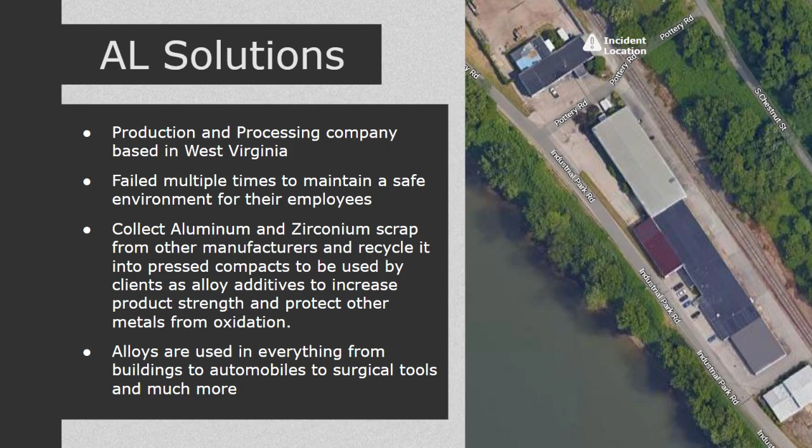Although AL Solutions is integral to society, they have failed multiple times to maintain a safe environment for their employees. The most notable of these incidents is the dust explosion at their New Cumberland location on December 9th, 2010. Three operators were fatally injured, and a contractor was wounded in the blast.

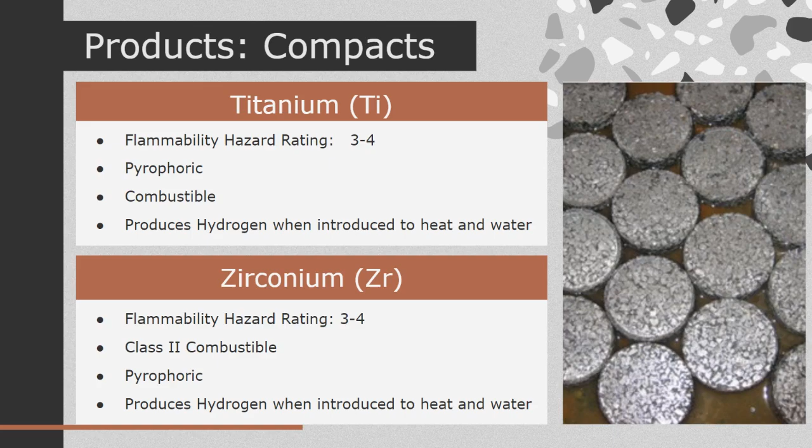Pmax, or maximum pressure, is the greatest amount of pressure and maximum amount of damage that the dust can cause in a confined space, while Kst is the dust constant. Maximum explosion pressure can be independent from the size of the vessel, but the rate of the explosion pressure cannot be. Because of this, the larger the vessel, the lower the maximum rate of pressure rise will be.

The constants are given classifications based on the range they are in. For both zirconium and titanium, they fall within the range of 1 to 200 bar meters per second. This classifies them as ST1s, or weak explosions.

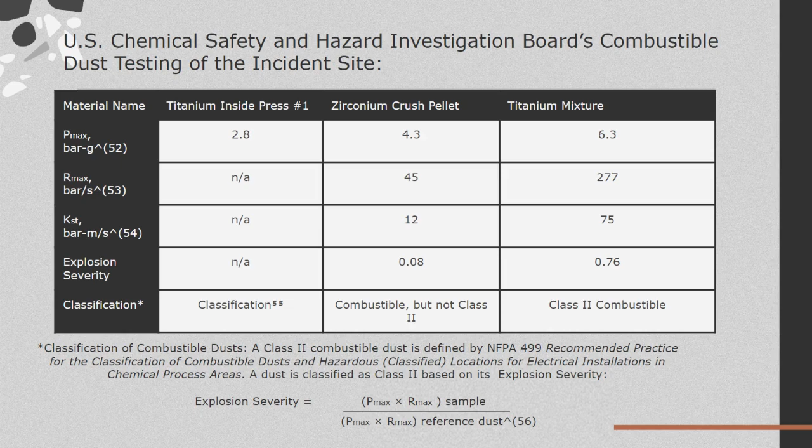During the incident, two operators were on presses and another was working the blender. The blender's metal blades struck the metal wall, causing an ignition source and ignited the zirconium inside. Zirconium dust cloud wafted into the air and exploded. This ignited all the storage drums filled with titanium and zirconium, leading to extensive damage.

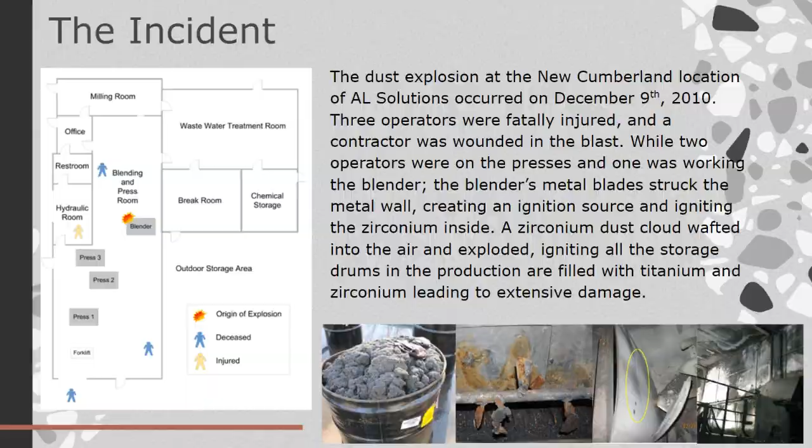Leading up to this incident, safety requirements such as closing the lids of the blender, storage drums, and hydraulic presses whenever possible, keeping material not in production in a separate warehouse, and industrial hygiene practices were never reinforced by management.

This resulted in a non-existent safety culture, and in addition to this, when the blender started to make metal-on-metal contact, management only went as far as enacting short-term solutions like replacing parts or readjusting the blades instead of readjusting the entire blender or replacing the entire blender.

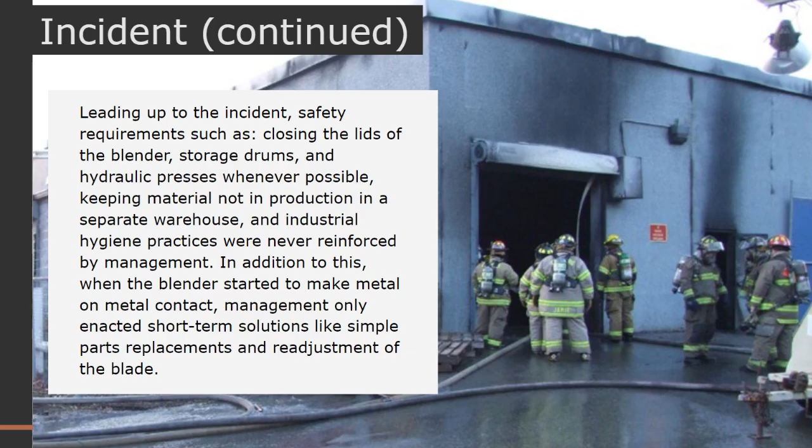The USCSB created a model of the process that led to the explosion, which I will now play.

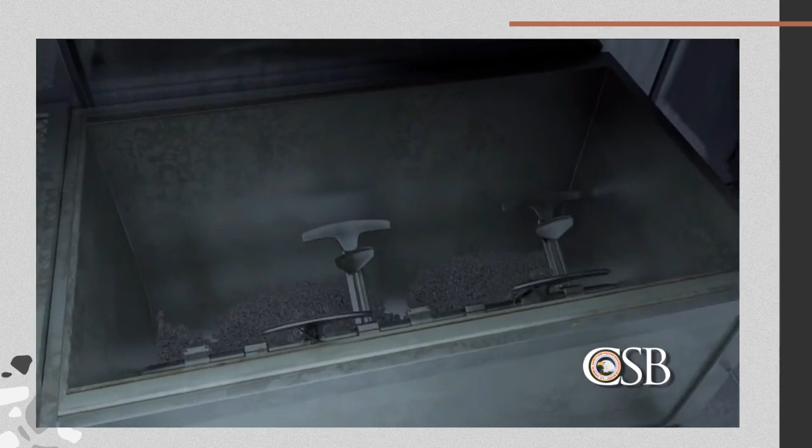As the metals were broken down during milling, the risk of a metal dust fire or explosion increased as the metal particles decreased in size. A metal blender used to process zirconium was having mechanical problems that had not been adequately repaired. As a result, the blender was producing heat or sparks due to metal-to-metal contact. Around 1:20 p.m. on December 9, 2010, a spark or hotspot from the blender likely ignited the zirconium powder inside. The resulting flash fire lofted the metal dust particles in the blender, forming a burning metal dust cloud. The cloud ignited other combustible dust within the production building, causing a secondary explosion that ripped through the plant, killing 3 workers and injuring a contract employee.

Dust explosions require 5 things: fuel, an oxidizer, the suspension of the dust particles, the confinement of the dust particles, and the source of ignition. The removal of either the suspension or confinement element can prevent an explosion, but that won't prevent a dust fire from occurring.

The titanium and zirconium acted as fuel in the situation, with air being the oxidizer, while the metal blender took up the role of confinement, suspension, and the ignition source. The heat from the metal-on-metal contact in the blender created the ignition for the first explosion. This ignition source would have been completely non-existent had the blender been properly maintained.

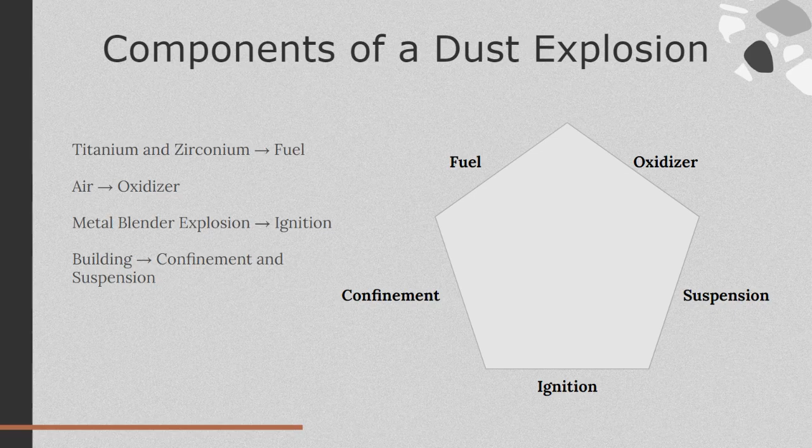Now, to estimate the volume of the inside of the building for our formula, we went back to the video that the USCSB created. A standard door in the US is 36 inches wide and 80 inches tall. Using this information, we can estimate the building's exterior to be 504 inches wide and 192 inches tall. That can also be stated as 12.8 meters wide and 4.88 meters tall.

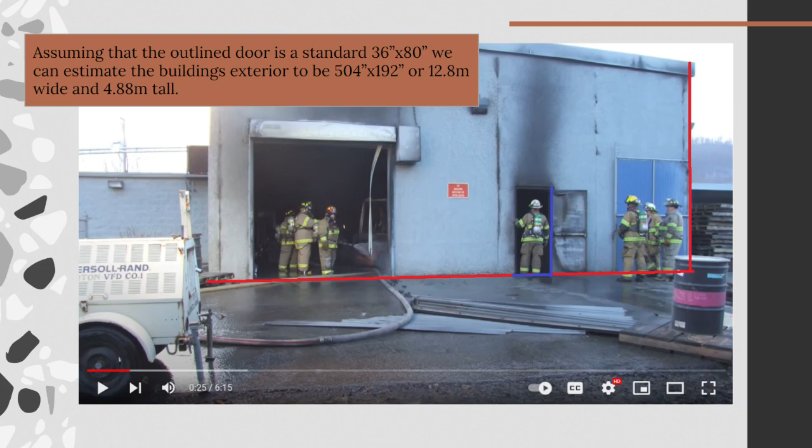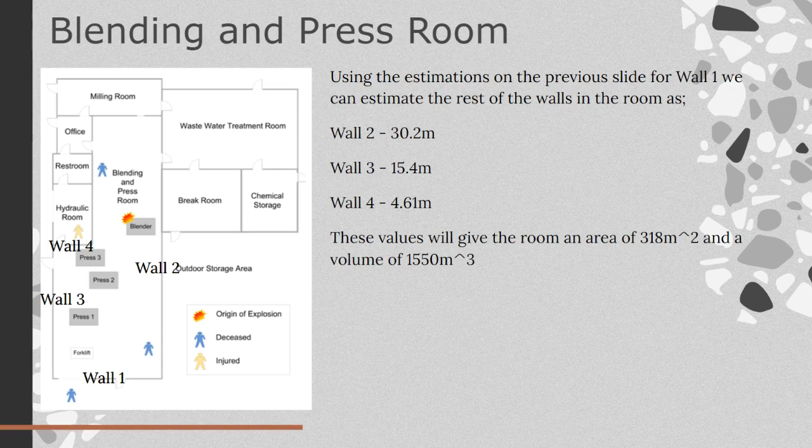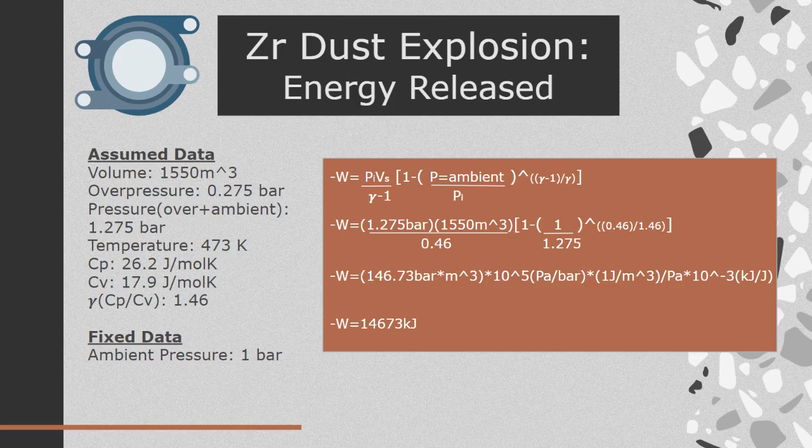Using that information, along with the floor plan included in the CSB's report, we can determine the size of the room for our estimation. This calculation gives us a volume of 1,550 meters cubed. Going back to the equation we used previously, we can keep the assumptions based off the environmental surroundings and change only the volume. This change will give us a new energy output of 14,673 kilojoules. This amount of energy is equivalent to 3.51 kilograms of TNT.

As a result of this incident, AL Solutions lost 3 employees, caused pollution to the environment, and damaged the blender, a forklift, the process feed conveyor, and part of the facility. They also had to pay a $100,000 fine in settlement to the US and paid another 17.5 million to settle wrongful death claims, and also lost money having to hold production for a period of time. This amounted to significant losses that could have been avoided if proper long-term solutions had been introduced to their system.

The introduction of a dust collection system, recommended by industry standards, would manage the dust without adding water to the facility and causing the accumulation of hydrogen if a fire occurred. Installing ventilation for hydrogen would also be beneficial, although with the previously mentioned system, it wouldn't be a priority. Another change would have been to add Class D fire extinguishers in the event that a metal fire did occur. Each extinguisher is about $824 at Fire and Safety Plus and similar sellers.

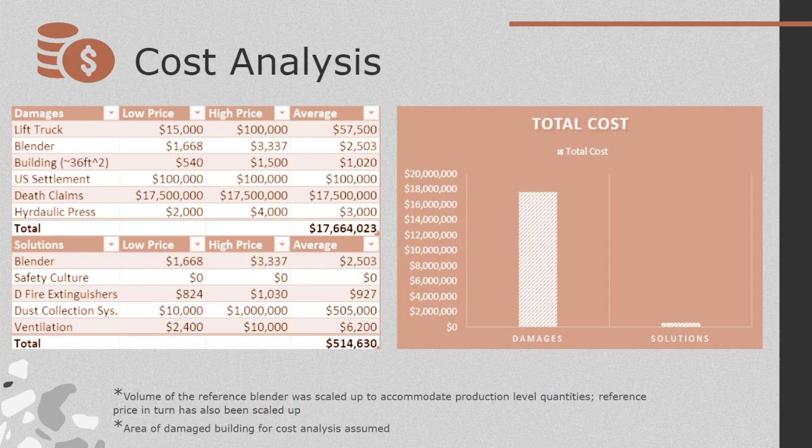Sadly though, AL Solutions never has had a good record when it comes to workplace safety. Besides the 2010 incident we discussed, AL Solutions has had two other incidents in which workers were fatally injured, and in a time period of 10 years, they had 7 other fires that were severe enough to the point where the fire department had to be called in to handle them.

As chemical engineers, we have a responsibility of understanding risk and protecting others as well as the environment by complying to strict safety guidelines and leading by example. We take a code to do no harm, and we must take that seriously for the overall betterment of ourselves and society. Learning from the mistakes of others can help us do that. This case study is dedicated to the 3 men who lost their lives as a result of the AL Solutions incident on December 9th, 2010: James Eugene Fish, Jeffrey Scott Fish, and Steve Swain.